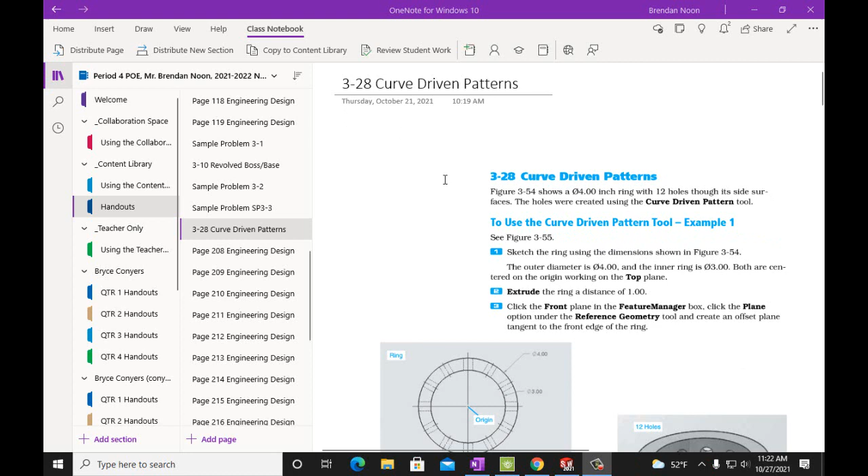Today I'm going to demonstrate how to create curve-driven patterns with Solidworks. This is Chapter 3, Section 3-28, and we have our instructions right here, 1 through 8. Not a lot of instructions there, but we have pictures that go along with it.

First thing we're going to do is make this ring, which is 3 inches on the inside and 4 inches on the outside, and it's in inches. So I'm going to go into my options here, Tools, Options. I have it set default for units of millimeters, so I'm going to switch it to inches, pounds, seconds.

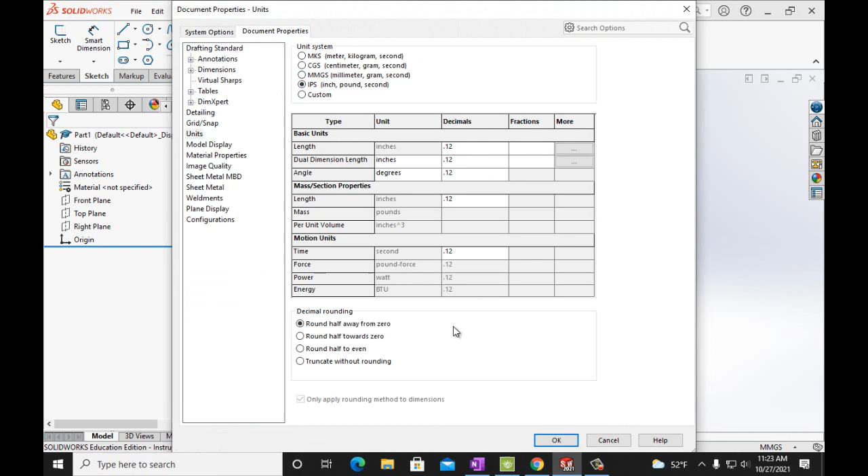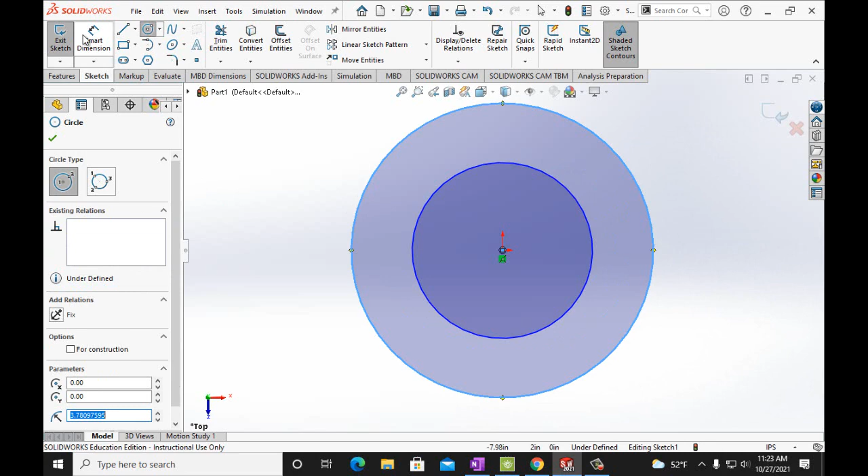We're going to start with the top plane and sketch our 2 circles. One's going to be 3 inches, concentric, the other one's going to be 4 inches. So it's smart dimension that: 3 inches diameter, 4 inches diameter.

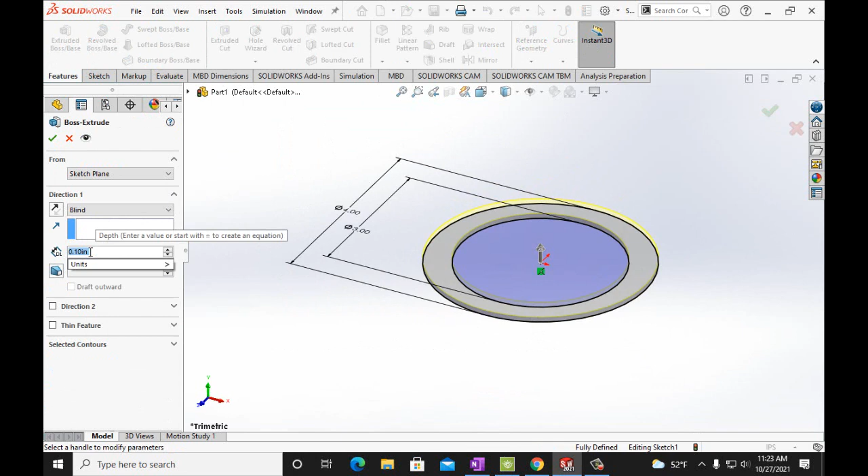Then we're going to extrude this, extrude boss base, and we want this to be 1 inch high. Alright, so we have the shape right here. Let's take a look - so we made this.

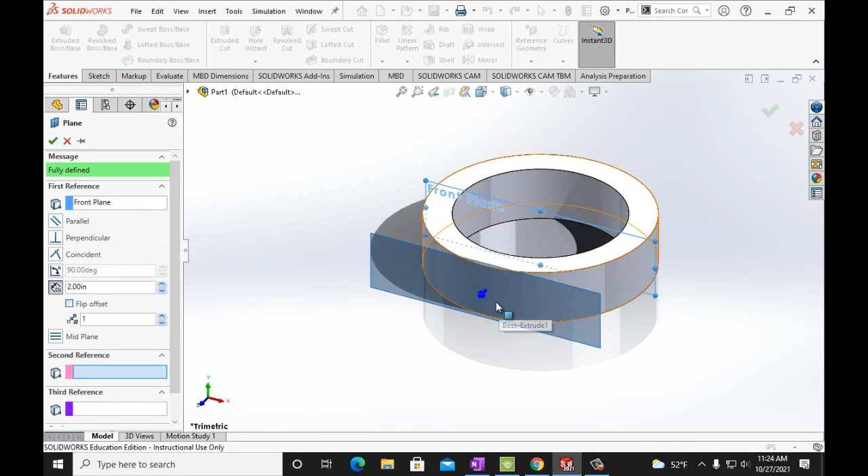Now we're going to create a plane offset from the front plane, and we're going to have this tangent to the ring that we just made. So let's use our offset front plane. We click on front plane, then we have reference geometry, click on plane, and we want this to be 2 inches. We have a diameter of 4 inches, so 2 inches would be tangent to that plane. We go OK.

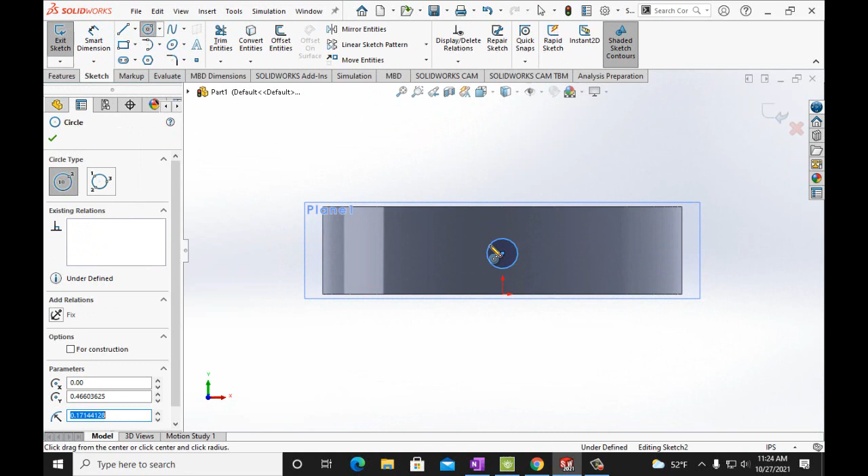We'll click on our front view, and we need to go ahead on plane 1, sketch, and sketch a circle. We want it to be centered, centered and centered. So this circle is 0.5 inches from the bottom, right in the middle, and it has a diameter of 0.38 inches.

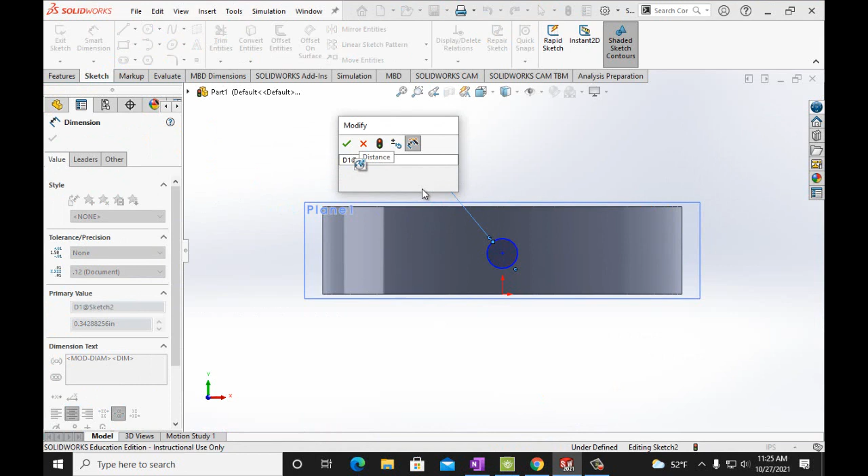So we're going to smart dimension this: 0.38 inches. We click on the center and click on the bottom line, and we want that to be 0.5 inches. Get the check mark, features.

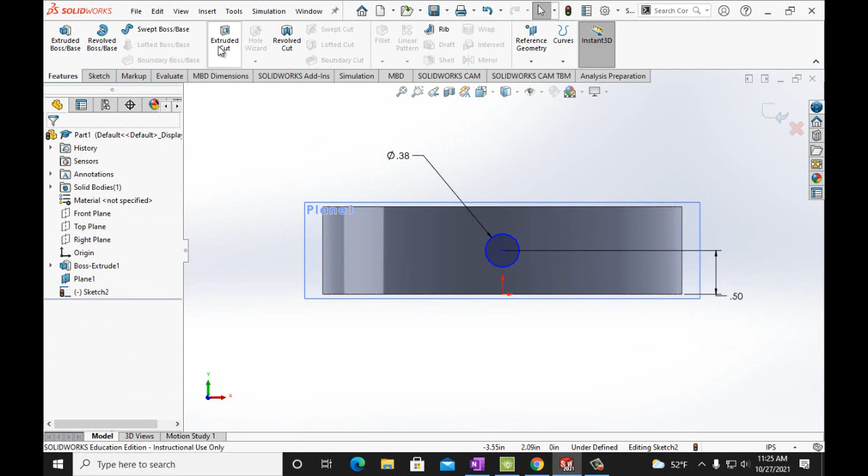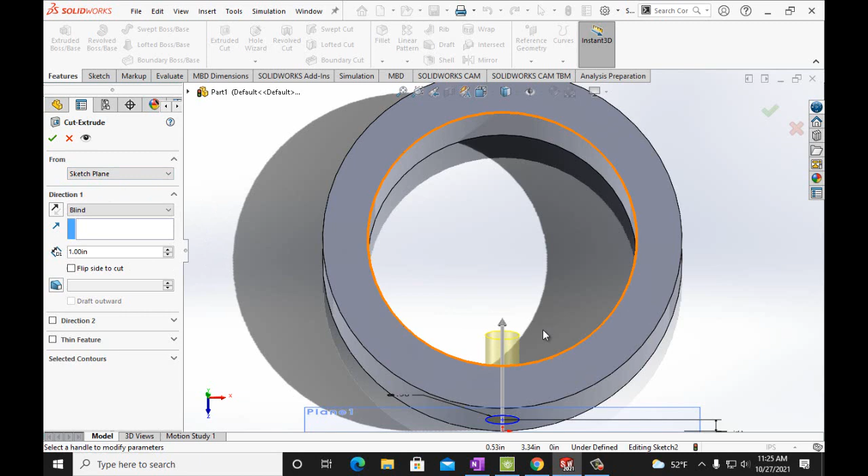We are going to extrude cut this to make it a hole. I'm going to click here and rotate this, so basically we just want to make sure it's through it. We don't want it to go through all, we just want it to go through the ring. You could even put this as 1 inch. You can see that that just goes inside. Hit the check mark - alright, so we just created this hole here.

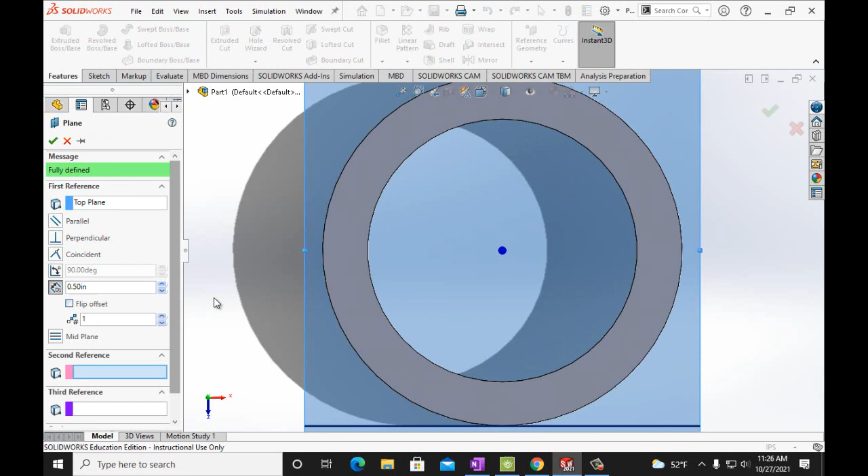Alright, so now let's go on the top plane. We're going to go with geometry, plane, and we want this to be 0.5, so we want that to be just in the center because this is 1 inch. We hit OK - you can see that this is cut right across the middle, 0.5.

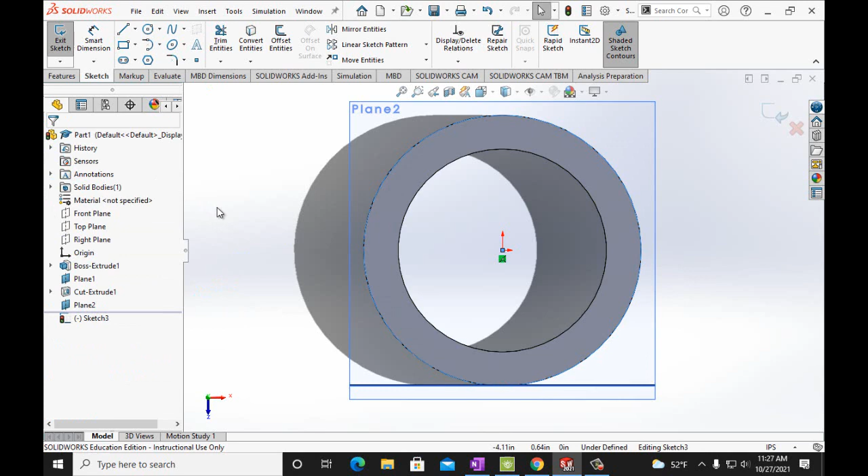Alright, so we're on plane 2, and we want to make sure we're going to do a drawing on plane 2. So we click on plane 2, then click on sketch, and do a circle - circle center point, concentric. It's going to be the same as our 4 inch circle, and we want that just for construction purposes. So we have it for construction. Click OK, now we click off, exit. We're going to exit - you see how this turns blue? Exit sketch.

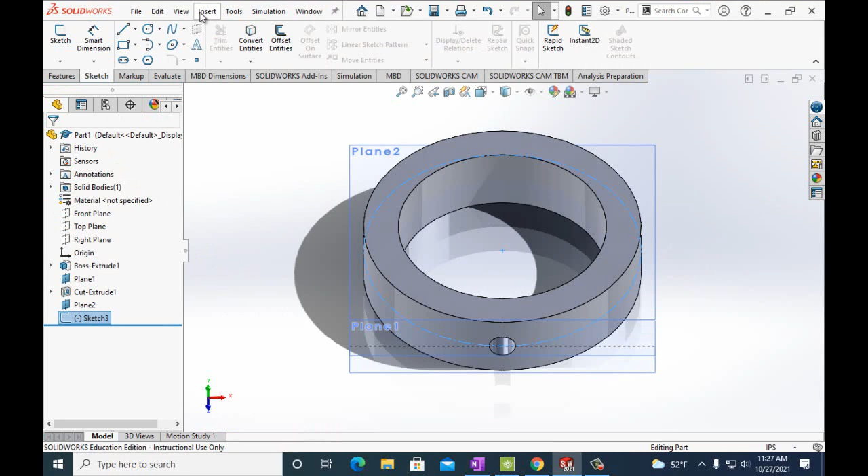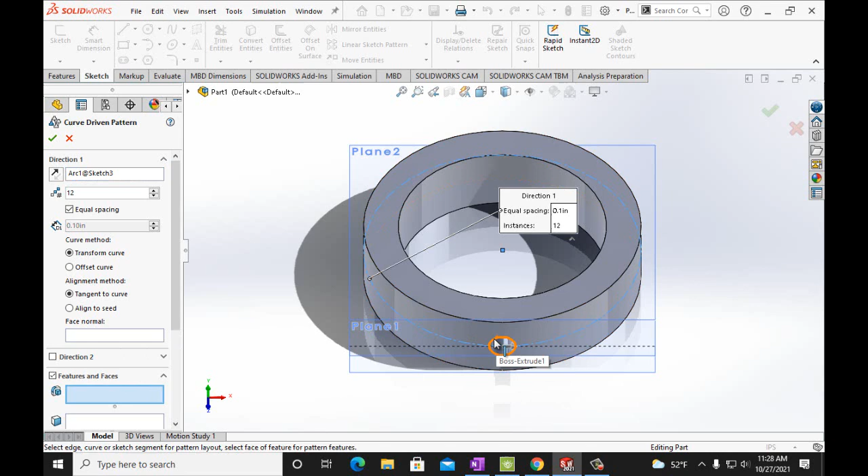And we want to use this curve driven pattern - it's in Insert, Pattern Mirror, Curve Driven Pattern. Make sure you have exit sketch, Insert, Pattern Mirror, Curve Driven Pattern. We have this up here, and we're going to create 12 of these. So we want transform curve, tangent to curve, and 12 of them. The direction we want it going around is this circle here, and the feature we want is the hole itself. You have the outside of the hole, then you can see that's the inside. When I click on that, you can see if I align it, it all goes in the same direction - it's all on the plane, and all goes to the plane.

If I have a tangent to the curve I selected, it goes around in this wonderful circular pattern. So I click on that, and there you go. There is our ring. All right, so we created our ring with 12 holes in it. All of this is right here. You can see it has tangent to curve, transform, equal spacing. Make sure there's equal spacing, 12 of them, and that you clicked on that sketch, the construction circle that we drew.

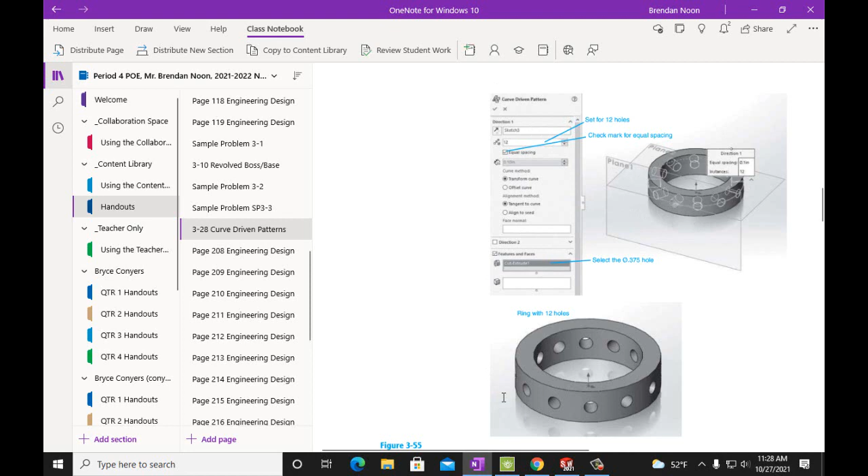So everything should be just like this, and then it'll work just fine. All right, now that we have this, this is 328 example 1. So let's go file, save as, part 3-28EX1.

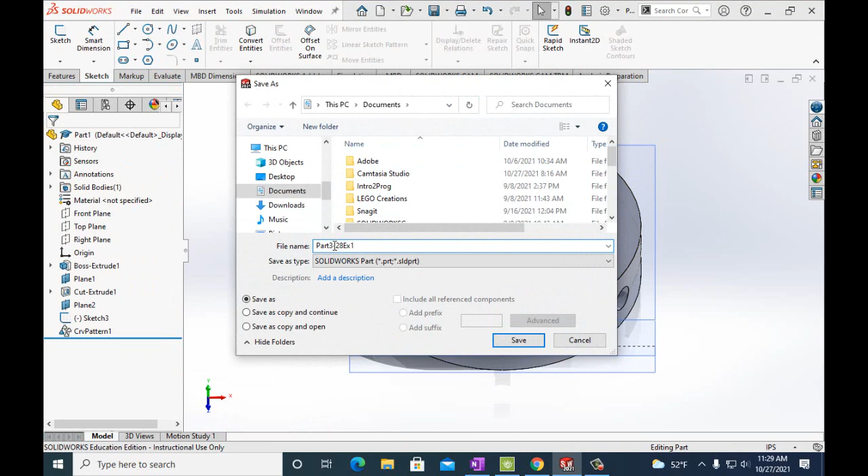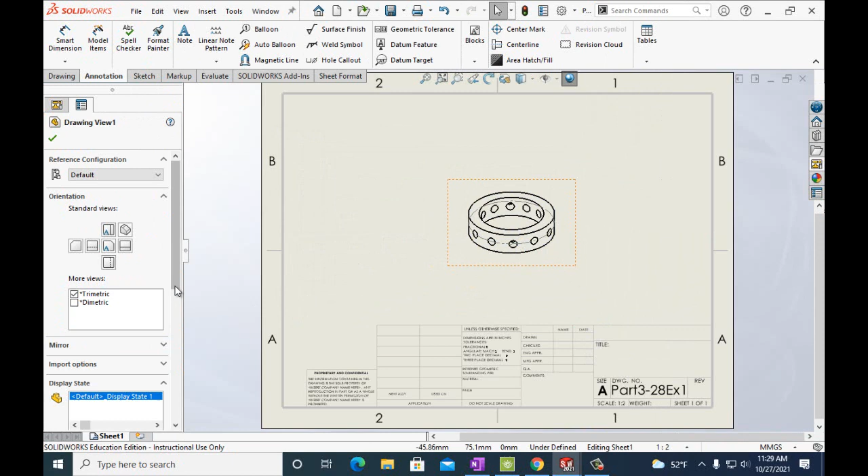Save. And then we're going to make drawing from part. Make sure we pick this first one, hit OK. All right, so you can pick this isometric view, trimetric, current view. I'll do this one here, drag that out there. That looks nice. All right, I always like to make it like this. I use custom scales. Let's see what a 2x1 is, too big.

1x1 looks fine. So we hit OK. We have a note. We come here, change the font size, pick any font we want, and then type in our name. Well, that's nice. Hit check mark. You got your name in there.

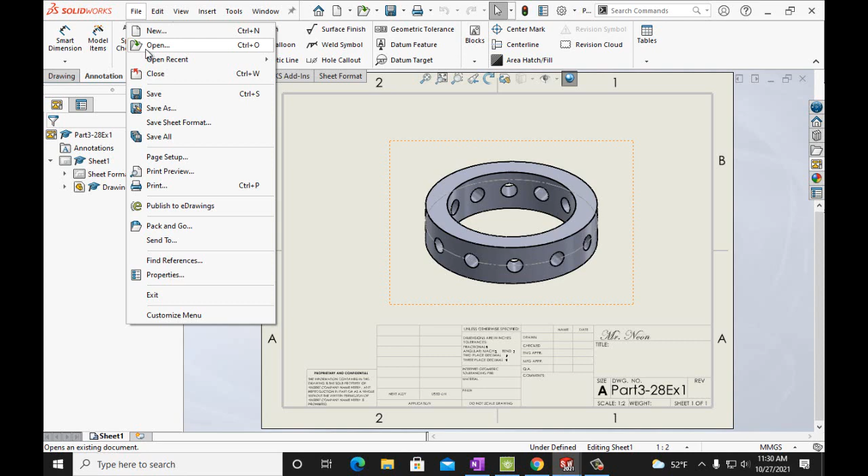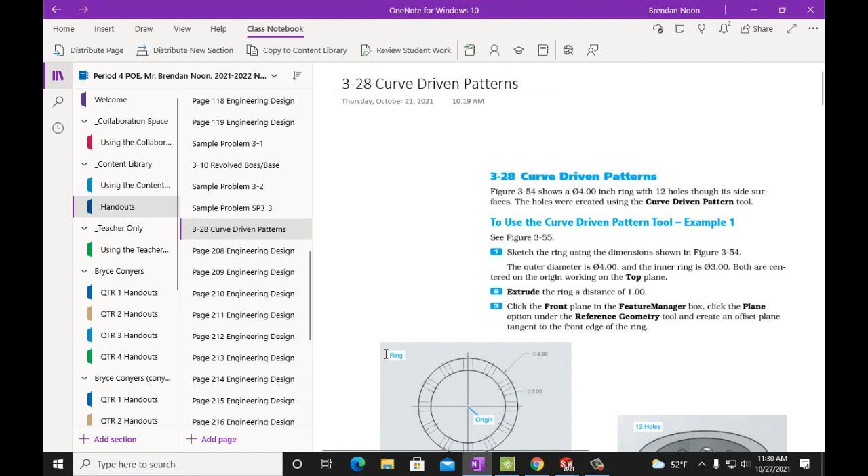And then I go file, save. OK. File, print. Make sure I go to OneNote for Windows 10. Hit OK. Make sure it's in our handouts. Hit OK. And then that's submitted.

328 example 1. So I'm going to do part 3-28 Ex1. All right, so that's all submitted.

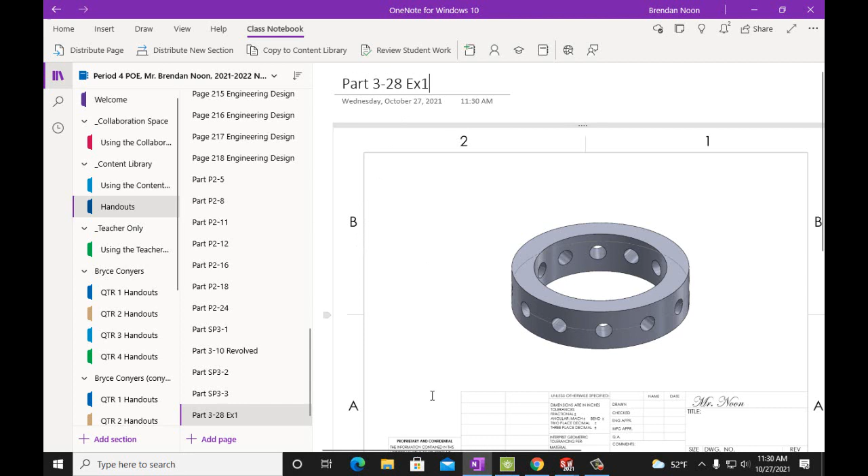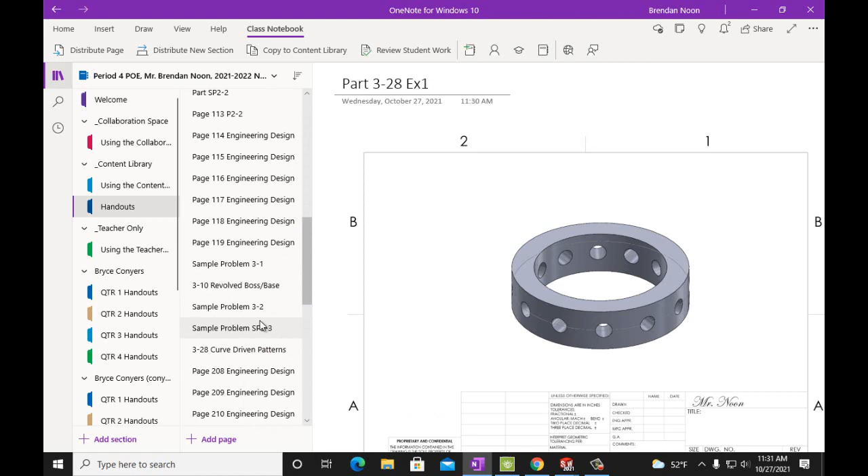Now we go to the next one. So let's take a look at our next example here. Go back up here. All right, so we go to the next one. We're going to be making this crazy shape. All right, so we've got step by step in here, which is nice. All right, so I'm going to start.

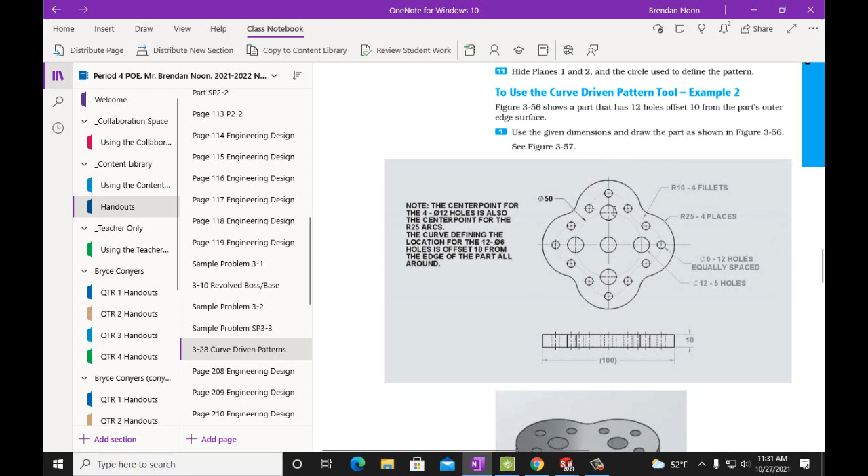First thing I'm going to do is make these center lines, horizontal and vertical axis. And then I'm going to make this little circle that's 12 millimeters. So this is all millimeters. And I'm going to make this large circle for construction that has a diameter of 50 millimeters.

All right, so let's go ahead, get rid of this, get rid of this. Yep, save all. And then I'm going to do File, New, Part, OK. And I'm going to do the top plane, and I'm going to go to Tools, Options, back to Document Properties, Units, Millimeters. Okay, it's already there. Hit OK. That's my default. Top plane.

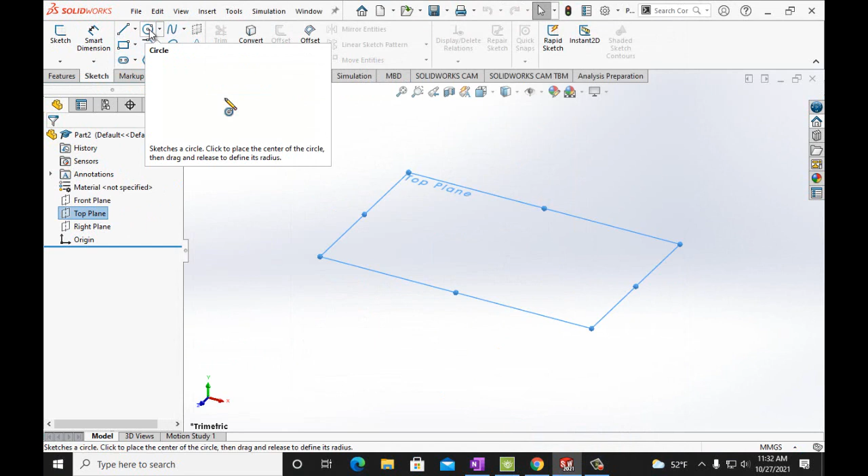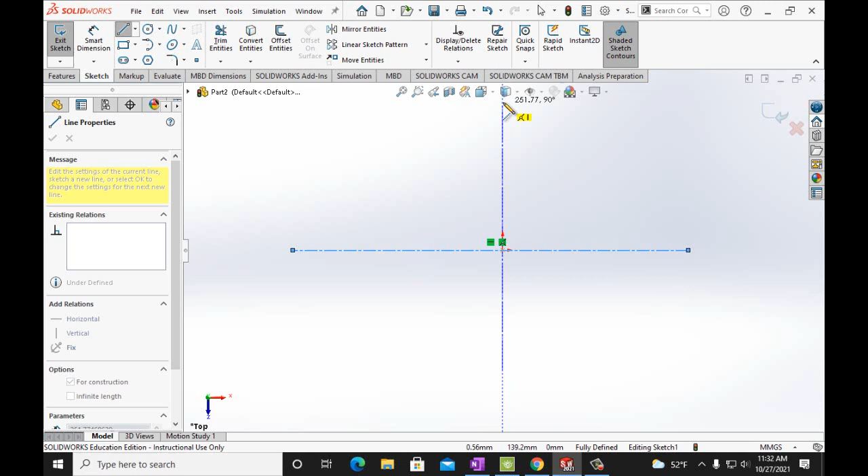And sketch. All right, I have a center line. I'm going to do a nice large center line. And then I have a vertical center line. I'm going to scroll out a little bit. All right, drop that there. Now I'm going to do my circles. I have a small circle, and then I have a concentric larger circle, and that one is for construction purposes.

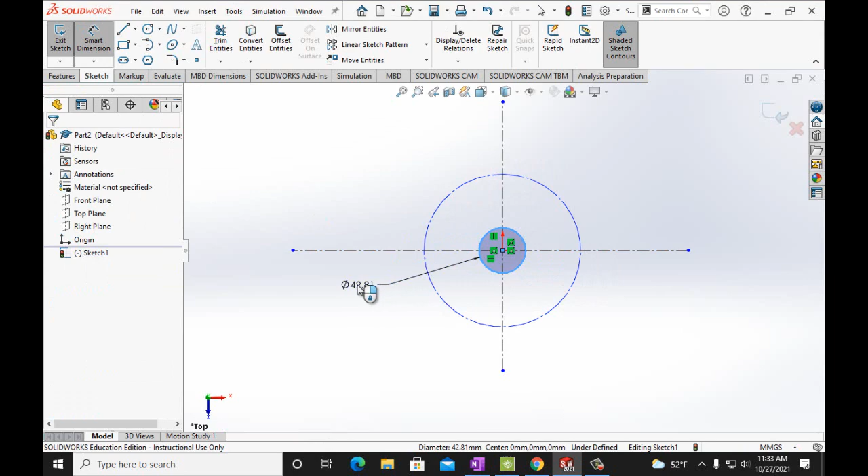So I hit OK. And now what I'm going to do is smart dimension that. So the little circles have a diameter of 12, and this circle has a diameter of 50. So smart dimension, 12 millimeters, 50 millimeters. All right, so now we have this.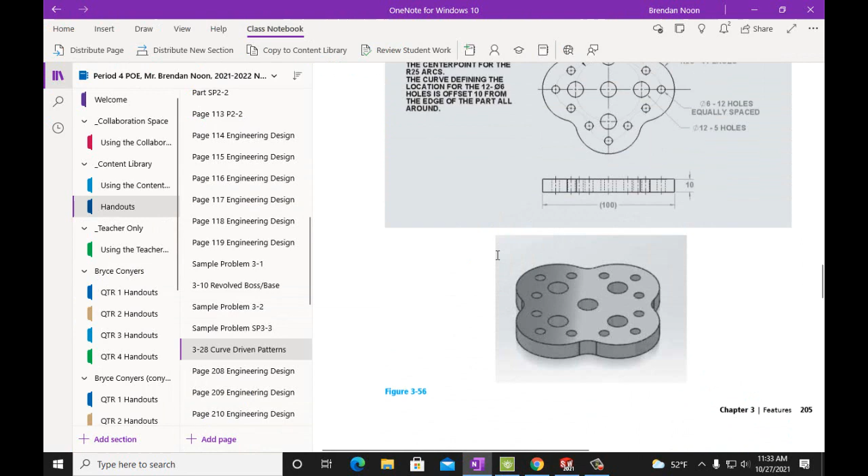All right, so I'm going to scroll out a little bit. So what we have here now is we're going to have center point arcs out here, and they have a radius of 25, or diameter 50 also. And then I have a circle inside with a diameter of 12. So let's go ahead, I'm going to do these circles and these circles together.

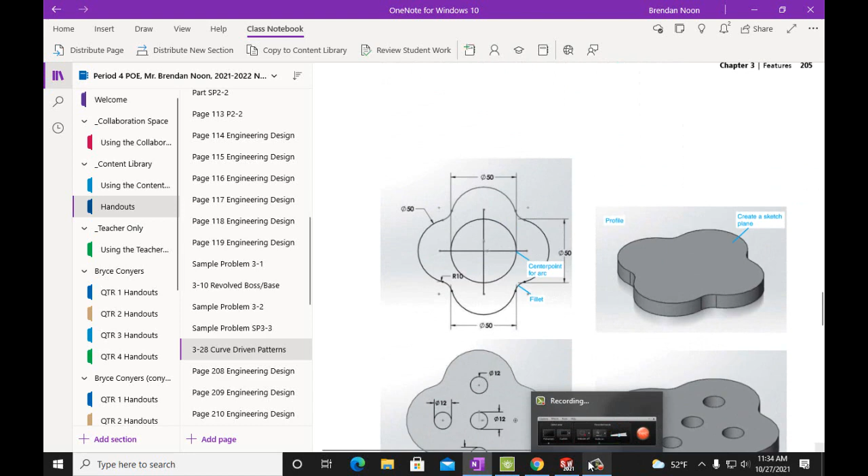So let's go here, and let's do a circle. We're gonna do a circle right there, and that has a diameter of 12 millimeters. So I'm gonna come back here, center point arc.

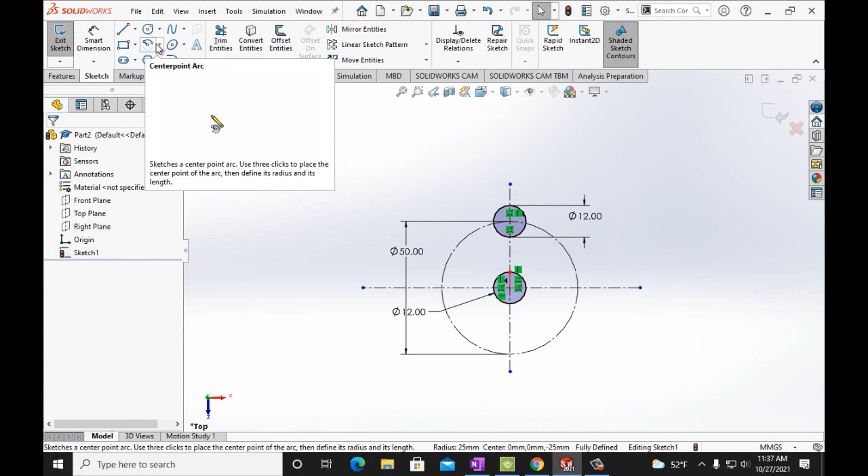I'm gonna be in the middle. I'm gonna draw this out, and a radius of 25. I'm going to do it just a little bit under the line. No, I'll do it like this, right on this line, right here. That's good. So I want this to be 25. It's close. Click from here to there. All right, so now I'm going to click on this.

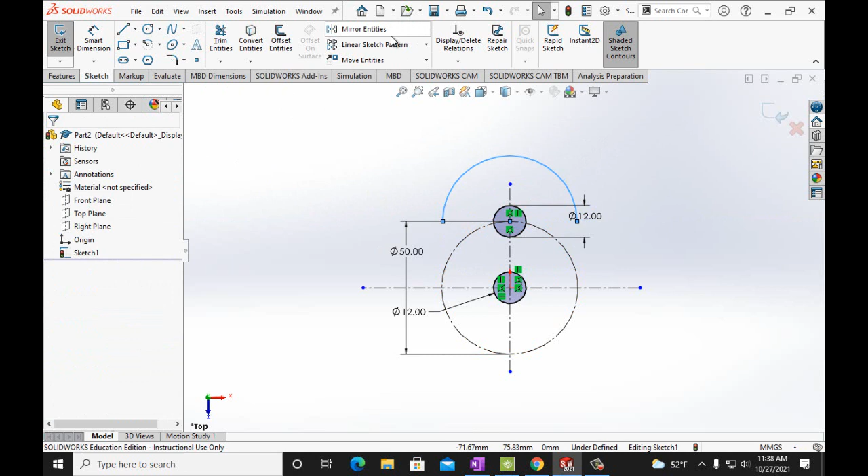I'm going to do my patterns, circular patterns. Yeah, so I got those. I also want these to go through. Those go through, and there's 4 of them, so I hit OK. So now I have this done.

Over here, this isn't together. Why is that? These aren't together either. Are these together? None of these are together. All right, so let's see. It says fillet corners. Let's see if we can fillet corners. Come in here.

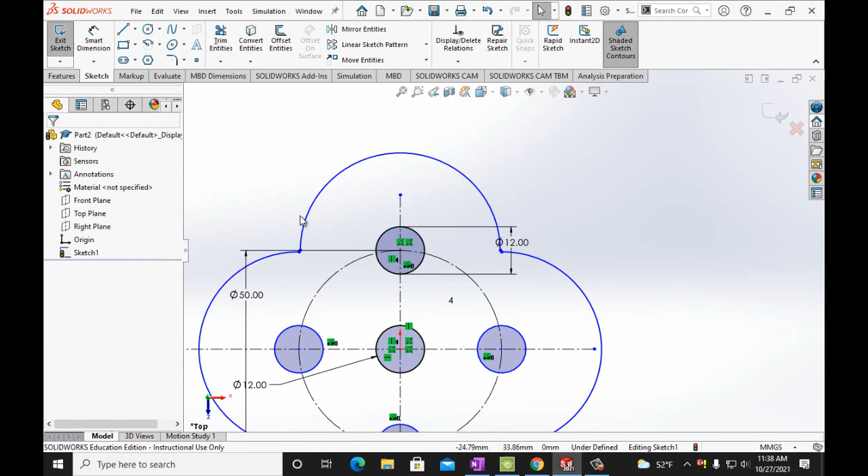Let's see if I can do this tangent arc. One, two... whoop. Here.

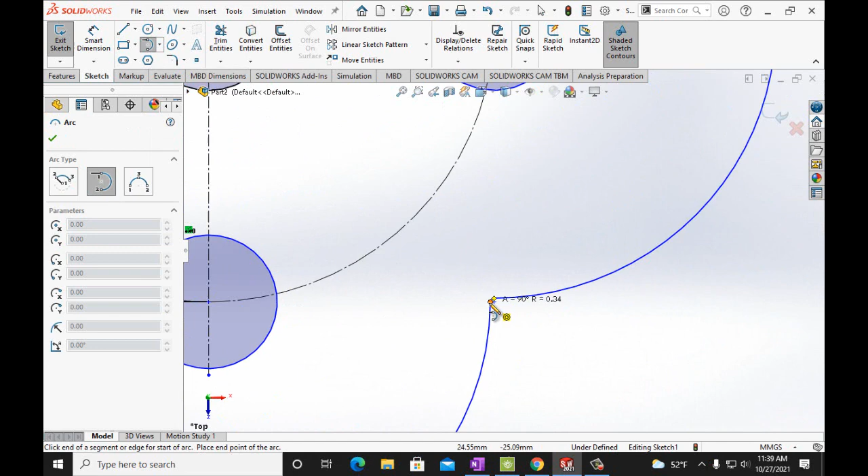All right, got that. Got one more here. So we join these together. So this is all closed. Now let's see if we can smart dimension this to be 10.

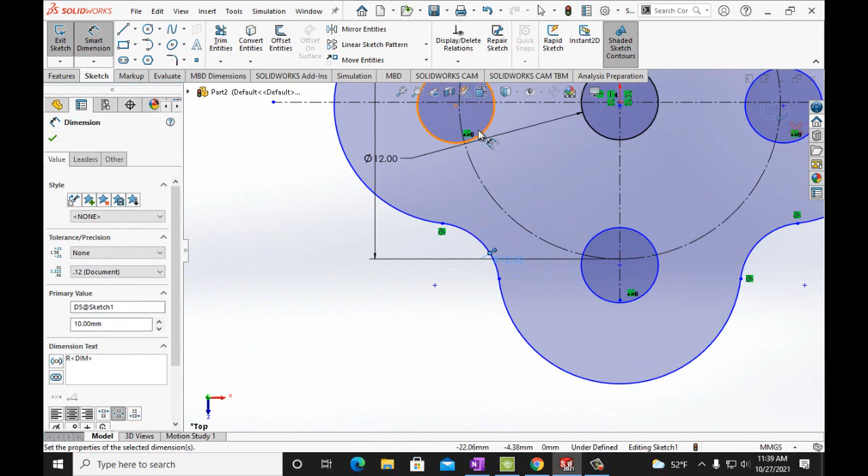10 millimeters. Yeah, okay, so there you go. That worked all the way around. That worked better. All right, so now we have all this done.

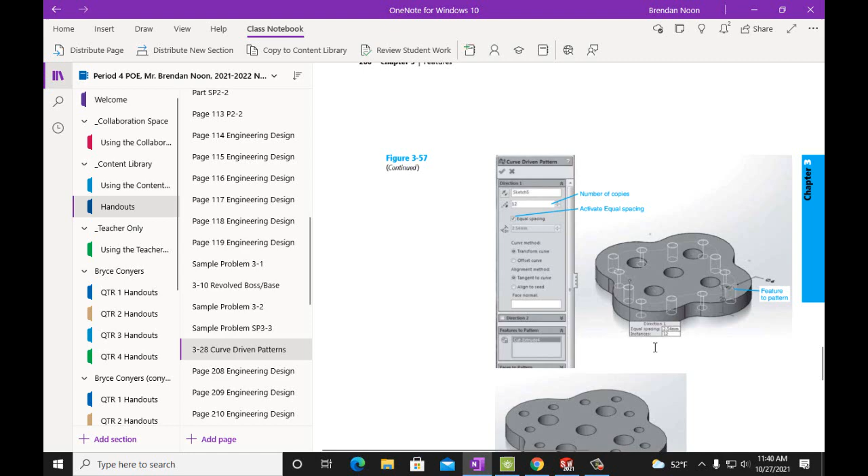We're going to extrude, features, extrude boss base. Let's come back here. How far is this extruded? Let's see, I think it's... 10 millimeters. Okay, so it's already set at 10 millimeters. So we got this extruded up 10 millimeters.

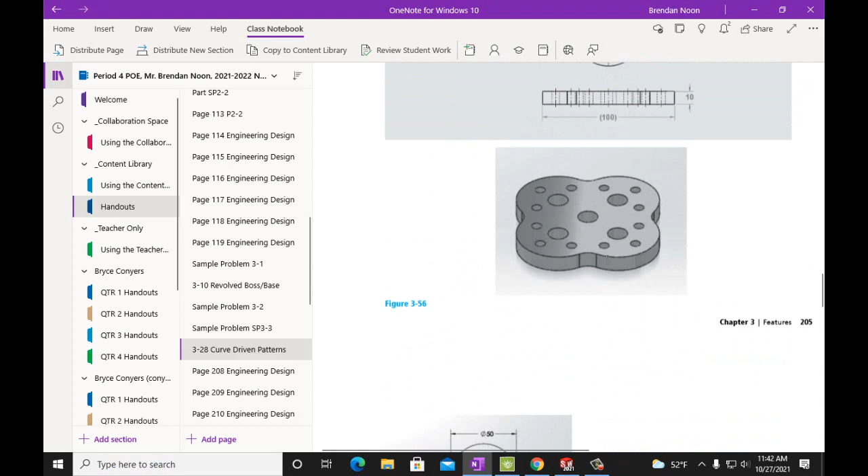All right, so we got number 1. We did that.

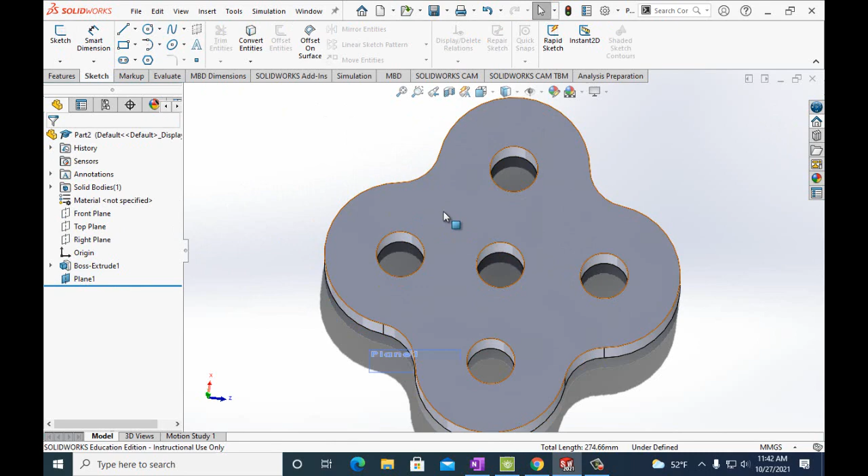Or maybe just do the top surface. Hold on. All right, so let's click on that. Exit sketch. Click on the face. No, hit sketch. Okay, offset entities. Oh, here we go. And then click on reverse. All right, so you see what I did there? I clicked on the face, then clicked sketch, then clicked on offset entities.

Now it's 10 millimeters outward. I want to reverse that so it's 10 millimeters inward, and then hit OK. All right, so that created this circle that's in here. Let me look at the picture. It says 10 millimeters.

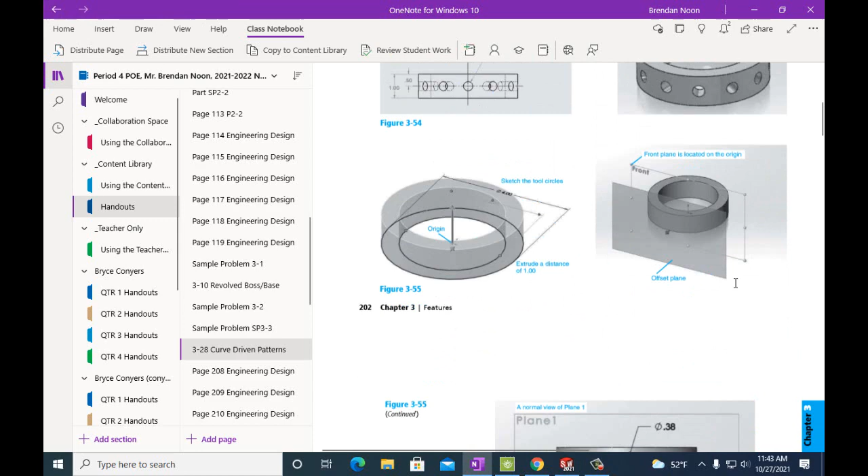Okay, so now I want to make a little circle that's 6, and I want its center to be right on that intersection right here. So there we go. I'm going to create my circle tool right there. I'm going to make a circle.

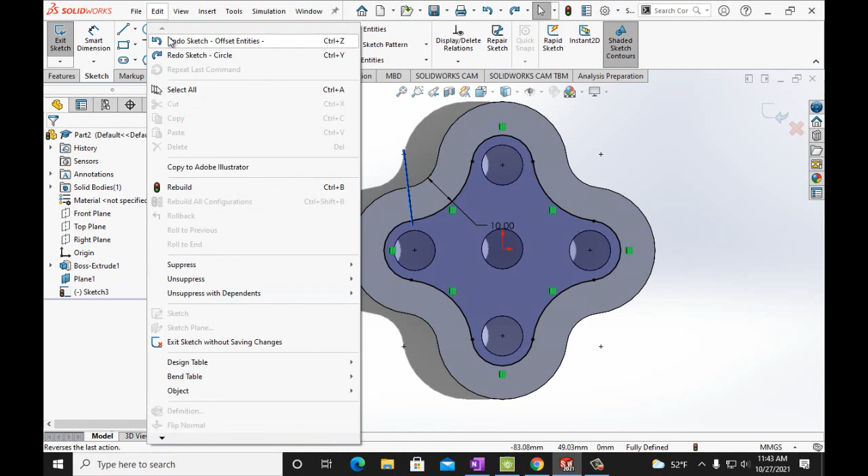And this does not seem right, so I'm going to edit, undo circle. I think what we want to do here is offset entities - I think we want to make it 5, and then hit reverse. I think that looks more realistic.

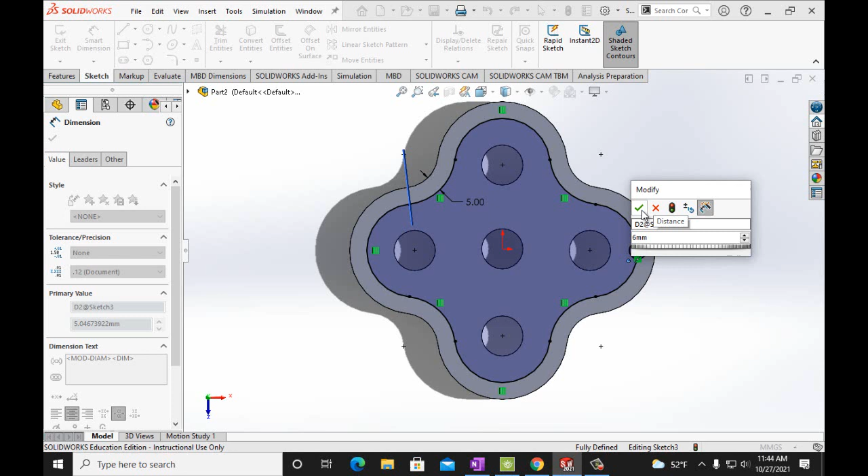So I think it's 10 - 5 and 5 is 10. I think that's what it's supposed to be. Okay, there we go. All right, so once again, circle, find this point right here. I'm going to draw a circle, and then smart dimension that to have a diameter of 6 millimeters. All right, that works great. So we have this circle, and it's on this line, so we're going to hit OK.

We're going to exit sketch. We're going to come through our pattern mirror, and we want curve pattern, and then we want this feature, this circle. We want this curve.

All right, so let's go back then. Let's do this again. Edit, undo. Extrude cut this circle - I'm going to just do through all. Hit OK. All right, so now we have this circle.

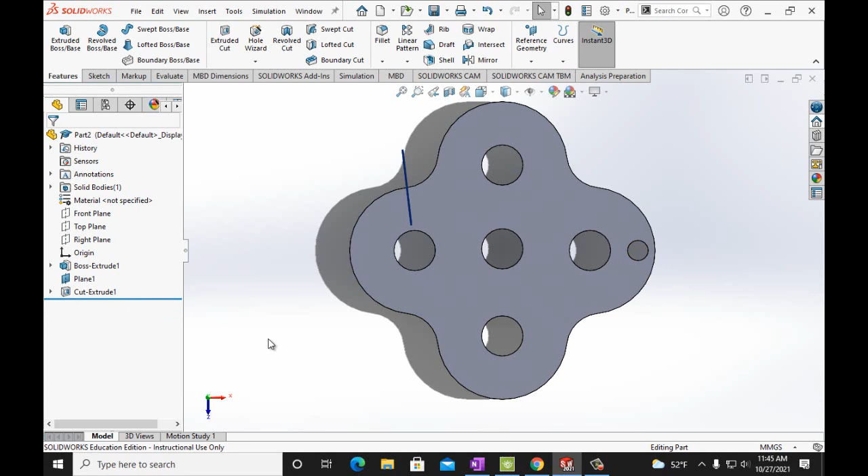Now I see, I do the circle first. Okay, so click on this again. Convert entities. Sketch, offset entities, 5, reverse. Okay, so now we have this here.

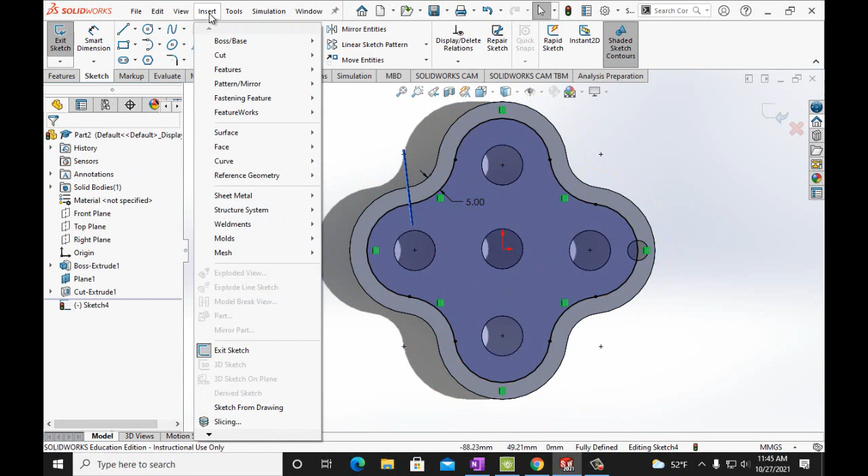Now we're going to go to Insert. Pattern mirror, or exit sketch. Exit sketch. Insert. Pattern mirror, curve driven pattern.

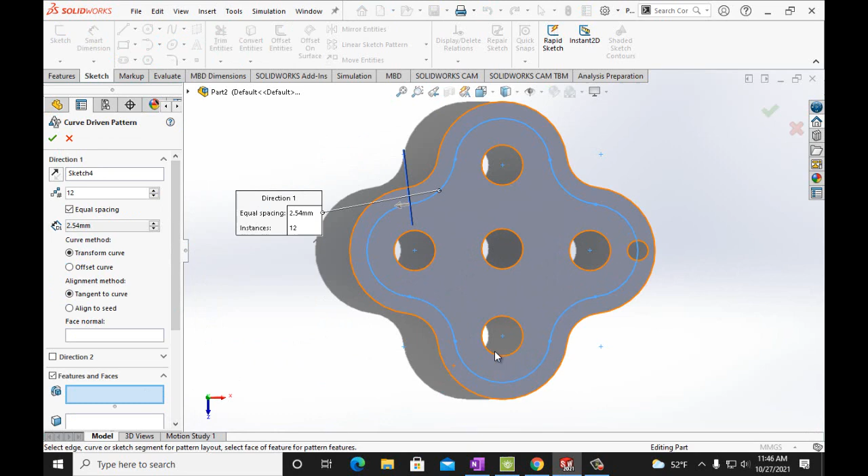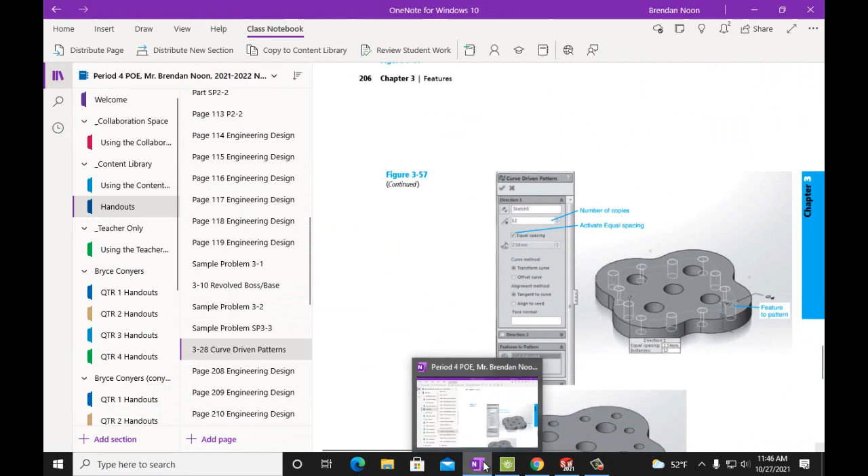Okay, that. And what we want to do is click on - I'm going to tap this. I want to click on the hole. There you go. How many of these do we have? I don't know, so let's go back and look at our... So we want 12, equal spacing. All right, so I think everything's set up perfect.

So it looks good. Go ahead and hit the check mark, and bam, there you go. There is our part. There's a little bit of confusion when doing this, but it comes out perfect. Let's see, yep, that's exactly what we want.

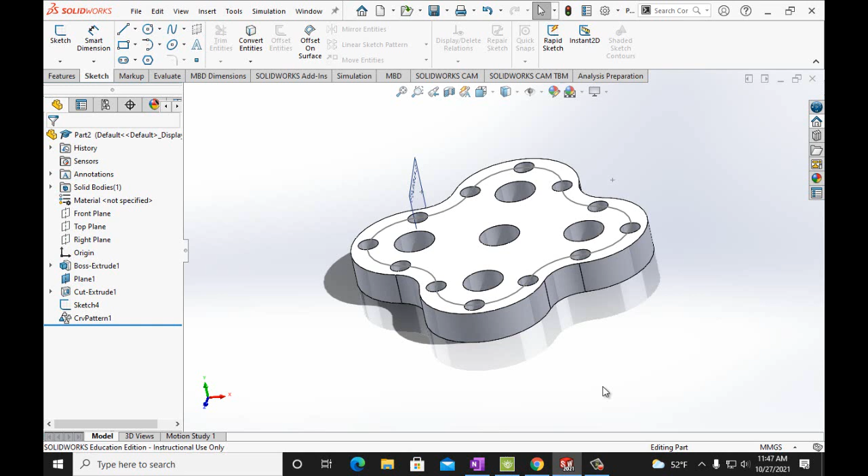All right, so we'll go ahead and do something like this. That looks good. Up a little bit. And do file, save as. We have part 3-28EX2.

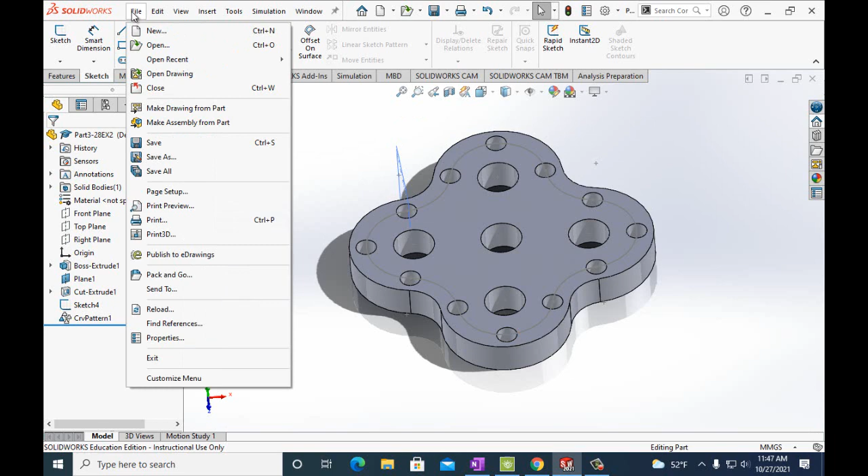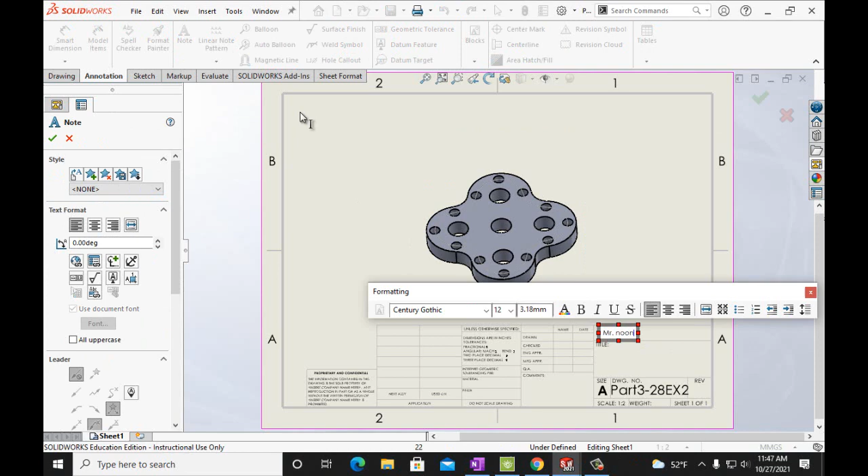Save. And then we're going to make a drawing from part. Make sure we got this. Hit OK. Drag it over, drop it. Go like that. Use custom size. Just do 1 by 1. OK, click our name, type our name. And then hit OK. File, save.

Save. File, print. Windows 10. OK, make sure we have handouts. Hit OK, and then we're done with both of them.